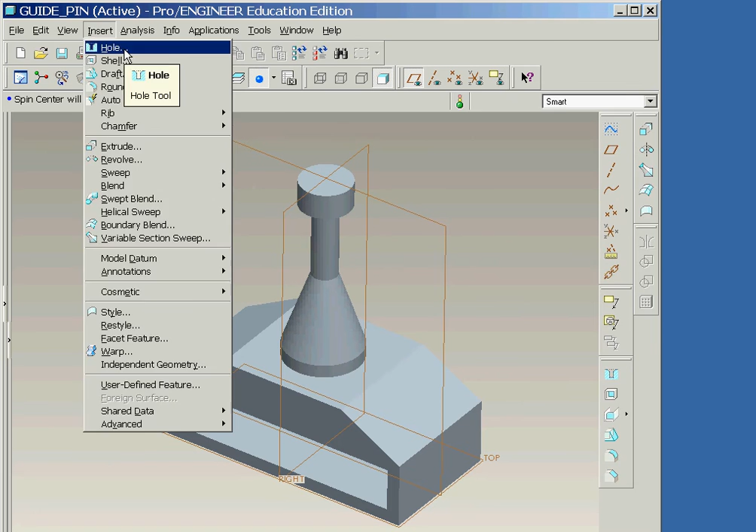During this session, we will add several different features to finish out the guide pin part. We'll begin by adding a hole on the inclined surfaces of the base. This time we'll make use of the pull-down commands, Insert, Hole, and then make sure that Straight is selected as the hole type in the dashboard.

We will now click on the inclined surface at the approximate location of the center of the hole. Using the drag handles, we will now select the front datum plane as a dimensioning reference and the upper edge of the end surface as shown here. We will now click on each of these dimensions and set their values to 3. And then change the diameter dimension to 2.

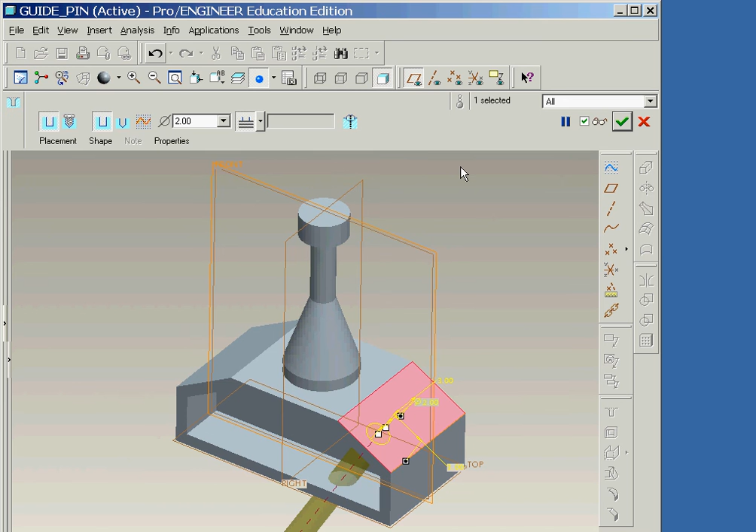In the depth specification area of the dashboard, we'll change it to Drill up to next surface. Then we'll click on the Verify button, followed by clicking on the check mark icon. Now that we have the first hole, we'll use 2 different copy operations to create the other holes. This is the same technique that was used to create the second pocket in the previous session.

Our first copy operation involves mirroring about the front datum plane. And then our second copy operation, which will copy both of the holes that now exist, involves first selecting them both by depressing the Control key while clicking on both holes, and then mirroring about the right datum plane.

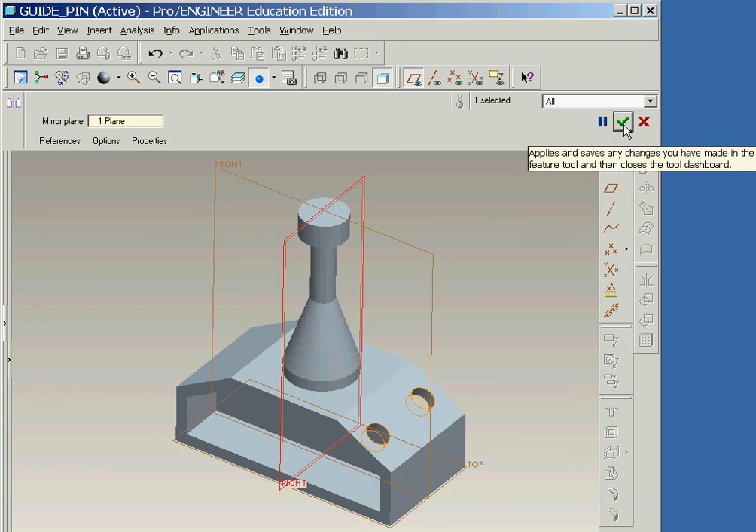We will now add a fillet where the shaft meets the base, and then round off the edges on the top of the guide pin. ProE uses the command round for both of these operations. We will start with a fillet by first pre-selecting the edge where the revolved feature meets the base. And then click the right mouse button and select the Round Edges option. Now we'll set the radius to 0.5 units. And then click the middle mouse button to finish.

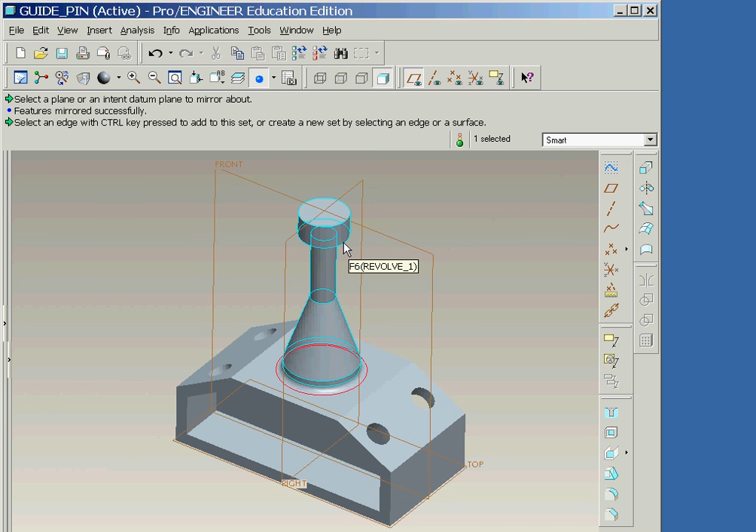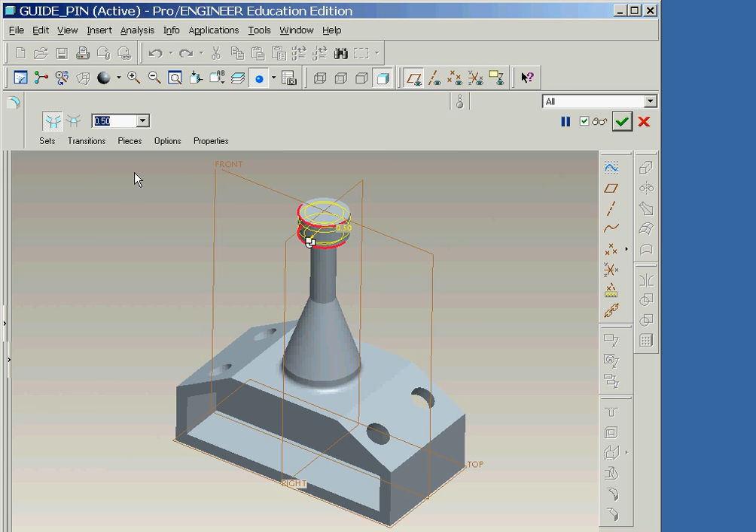The rounds at the top are created in a similar fashion. However, this time we'll select the edges while holding down the Control key, which allows multiple edges to be selected. Then we'll click the right mouse button and select the Round Edges option. Now the radius value is set to 0.5 units. And then we will click the middle mouse button to finish.

The final feature that we will add is a chamfer all around the side edges of the part. We will start by clicking on the chamfer icon. And then we will begin clicking on the edges of the part while holding down the Control key. After the last edge is selected, we'll set the chamfer size to 0.25 in the dashboard.

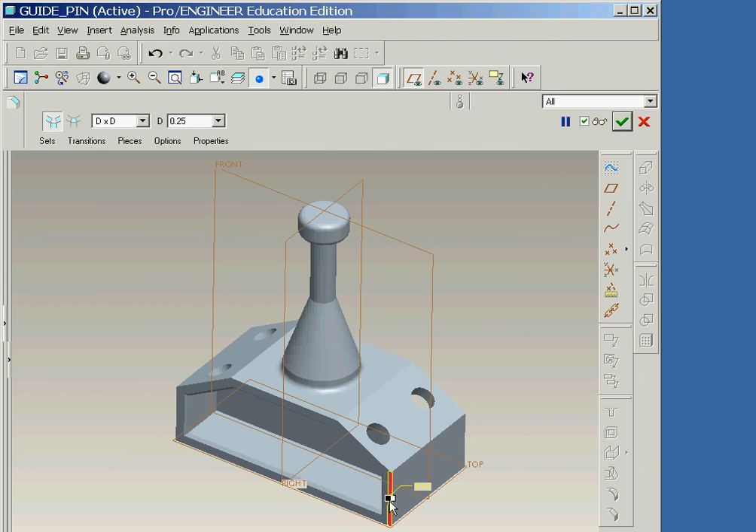We will now start the definition of a second set of edges by clicking on the edge shown here without holding down the Control key. And then holding down the Control key again, we will click on the other edges. And then finally, we'll verify and accept the chamfers.